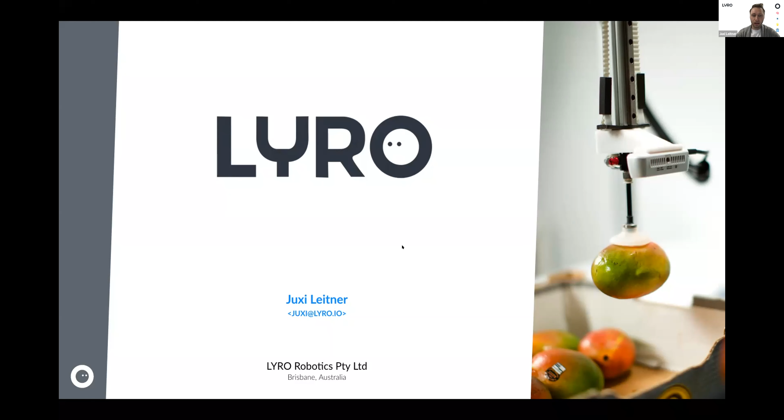So at LYRO, we're looking at solving some of the big challenges that are coming up in the 21st century. And particularly, we're building smart robotic systems that really help us to establish a robust, safe, and secure supply chain. And that has been brought up a few times before. I guess there are sort of three major issues, and one has to deal with fluctuation. The other one has to deal with global supply chains and how to secure them. And thirdly, how do we deal with traceability that also involves food safety, but also has abilities across other supply chains that are not just the food supply chain. And we can help with all of that.

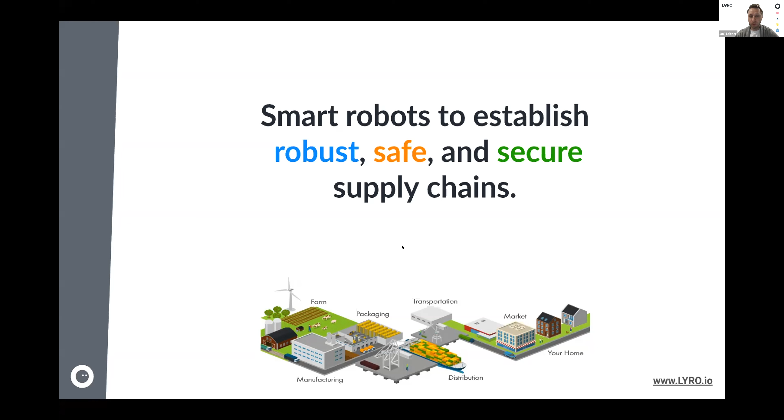So we're building robotic systems, specifically right now focused on smart picking and packing solutions that can be applied across a multitude of supply chains. And we're doing this with something that we call LYRO machine intelligence. And that's also been mentioned multiple times before. A tight integration of machine learning, computer vision, and robotics is actually crucial to what we can actually do right now, compared to what we could do 10 years ago in robotics. And that really is the breakthrough that allows us to perform smart picking and packing operations.

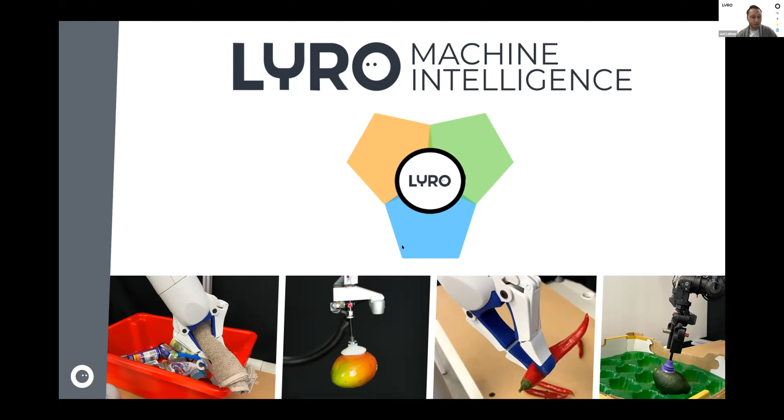For us, LYRO machine intelligence is sort of our core tech stack, but it's not just working on our robots. We build our own robot hardware as well, but it actually works across lots of different robot arms. So you can see some of them there on the bottom as well. LYRO really tries to get every robot out there to become a smart robotic system that can pick and pack. And this is technology that we've developed over the last decade or so here at the Centre for Robotic Vision. And it's actually a technology that also allowed us to win the Amazon Robotics Challenge, where we had a very cheap, cost-effective robot, but still outcompeted very, very large corporations. And it really shows the capability of what we can do.

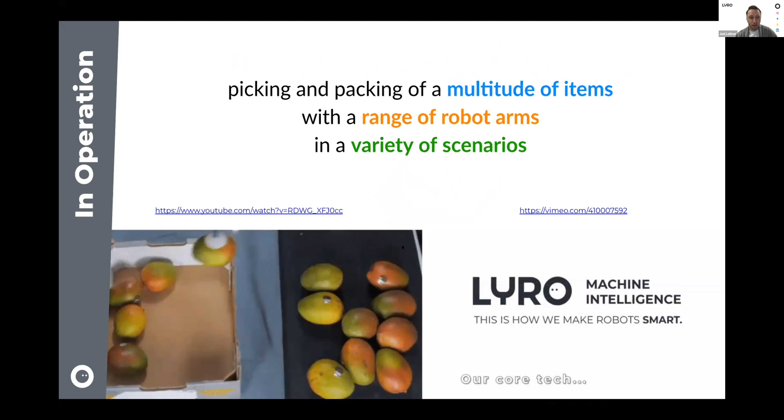Specifically, what we're really interested in is not just building a robotic system that works, but a robotic system that actually can scale up and work in lots of different scenarios. Our interesting first market is fruit picking and packing, and you can see mangoes being packed down there. We've deployed robotic systems that actually pack mangoes and avocados. I don't have video of those right now. They are still under embargo from the government that has funded our current video production. So they should be coming out. Ideally, it was planned to come out mid-August, but it probably is a bit slow because of the government having other issues at this point.

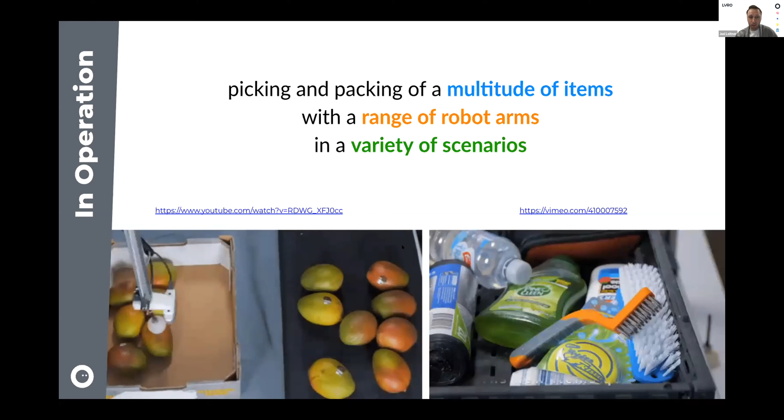But really the key point to take away here is that these robotic systems are not built to be agricultural robotic systems or specifically a mango packing system. It's a general purpose picking and packing solution. And you can see on the bottom, we actually have applied that to lots of different scenarios where we have e-commerce settings and different grippers. And that's really the exciting thing for us. Like, how can we scale this thing up from a $200 million market, which is what's been spent on fruit packing here in Australia, all the way to an e-commerce market, which is really, really very large. I think one thing that I want to discuss maybe a bit more later is robots as a service, and it's been coming up a few times.

And for me, I think, yes, it's a very interesting model, and it's been mentioned in the early panels as well. It's not just a new paradigm. It's actually a pretty old paradigm for certain cases. It is basically that your pay-per operation is usually B2B kind of services models that we're talking about, but what really makes it viable? And I think that's something that people tend to ignore.

First of all, you need a market that actually understands that there's a service model and that they're used to a servicing model, which in the food sector is actually pretty much a given, but in other sectors is more of a struggle. Secondly, you need a solution that is flexible enough, both on the hardware and the software side of things, that it can be reused in lots of scenarios and cases, which also is something that from an academic point of view, we really like, but also from a business point of view, it's something that sometimes people struggle with.

And thirdly, I think you need also a hardware solution that is cost effective, because in the end, you want multiple robots. If you're providing a service, you might need spare robots, or at least a good enough distribution system or manufacturing pipeline that actually allows you to have these robots out there, as well as easy to deploy robotic systems.

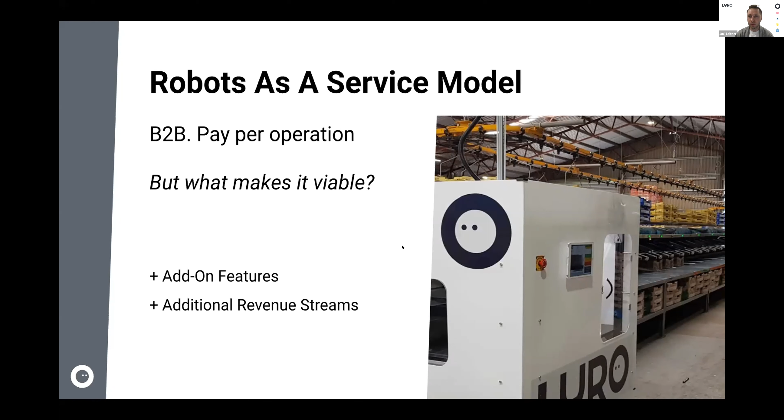This is our robot on an avocado packing shed here in Queensland just a week ago. And it took us less than 45 minutes from parking the van to starting packing avocados off the line. And this is really sort of the flexibility and the deployment that we really would like to see.

And the first one actually is about touch sensing in materials. And I think the previous presentation of Festo also showed that there's a lot of capabilities that are being developed right now there, but there's still a lot of questions of how to integrate touch with, for example, vision, and how to integrate smart materials to actually make these systems scalable.

The second one is a bit more of an AI question about reasoning, and it also was brought up in the previous presentation about DevOps, but also in a very early panel about how do you define your failure modes and how do you know when your system is working and when it's not working. And I think that still requires some academic research. And I think the whole area of dexterous manipulation, something that is a large scale manipulation problem, is still something that is providing a very fruitful avenue for academic research.

From an industry point of view, DevOps is definitely a key critical part of getting robots out there. And Florian's presentation definitely hit the nail for me there. That's really a critical aspect of getting robots out there. There's lots of companies that build a one-off robot that does something, but how to scale them up is going to be crucial. And that ties in with the second point as well.

Like, how do I retrofit existing operations? How do I integrate with other systems? That's clearly another hurdle that we need to overcome to have these robots out there.